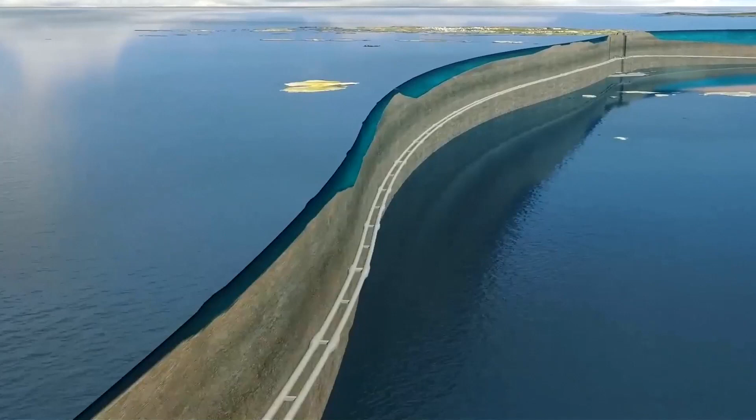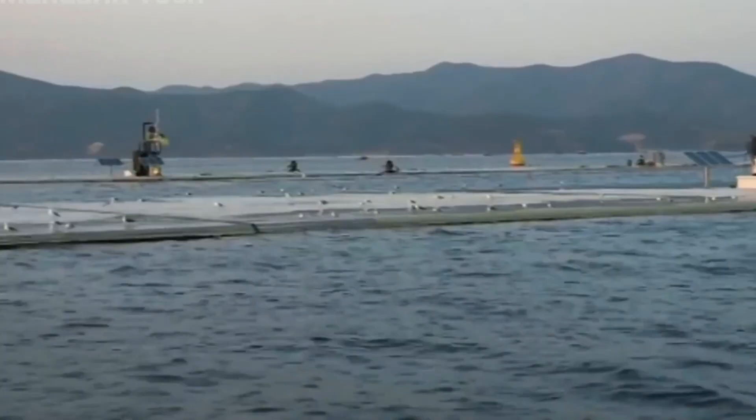It is a world of crushing pressure and absolute darkness, yet through it runs a ribbon of light and steel. Here, millions of tons of seawater hang suspended just meters above, held back by a seamless fusion of concrete and engineering, assembled with a precision that borders on the microscopic.

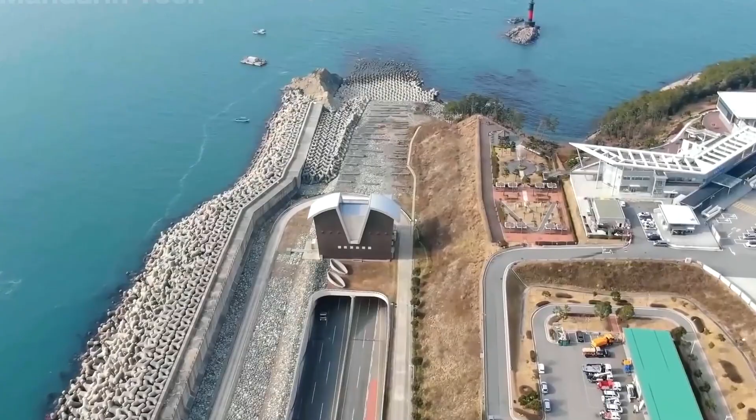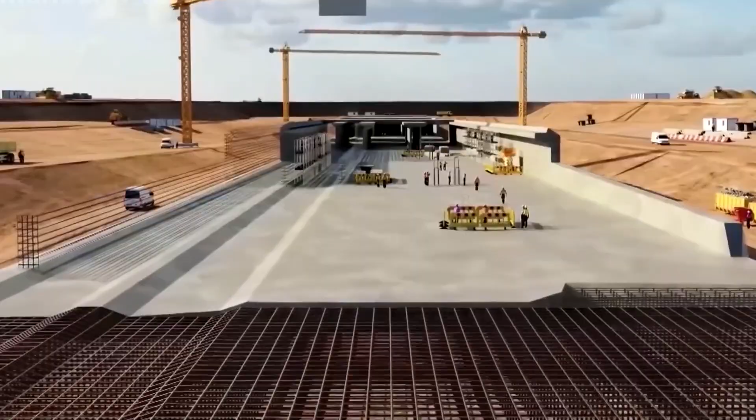This journey, seemingly torn from the pages of science fiction, is a testament to modern ingenuity. It is the reality of the underwater tunnel, a true triumph of human ambition. The question, however, is how such colossal structures are even possible.

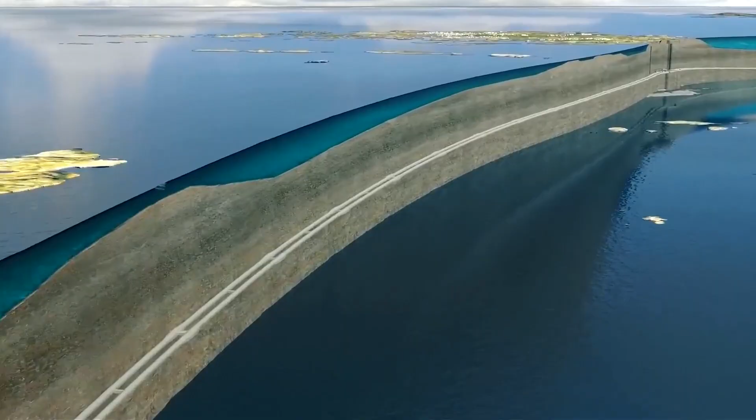How can we build in the face of immense water pressure, contend with shifting, unstable sediments, and operate in an environment utterly cut off from the world above? The answers lie deep beneath the waves, where humanity has learned to turn the impossible into breathtaking reality.

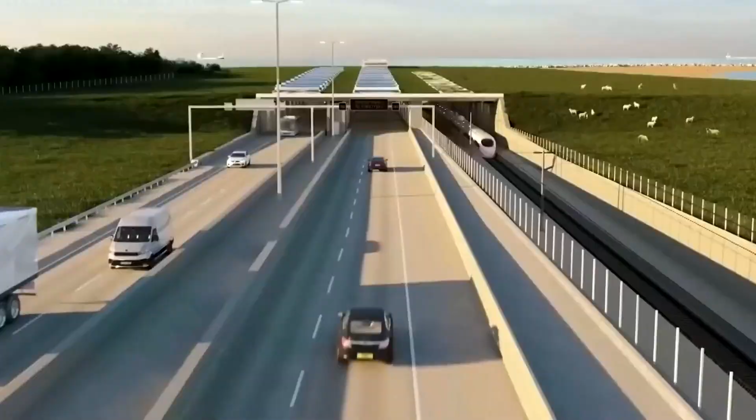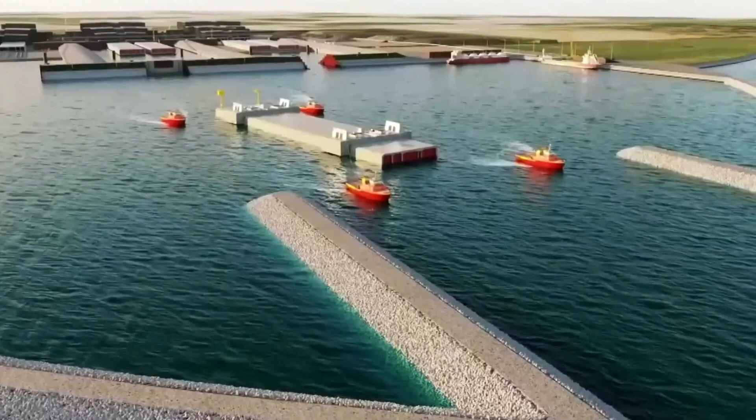Beneath the crushing weight of the ocean, a new world of connection is forged. These monumental passages are more than just engineering marvels. They are the lifelines reshaping global infrastructure and expanding the reach of human connection.

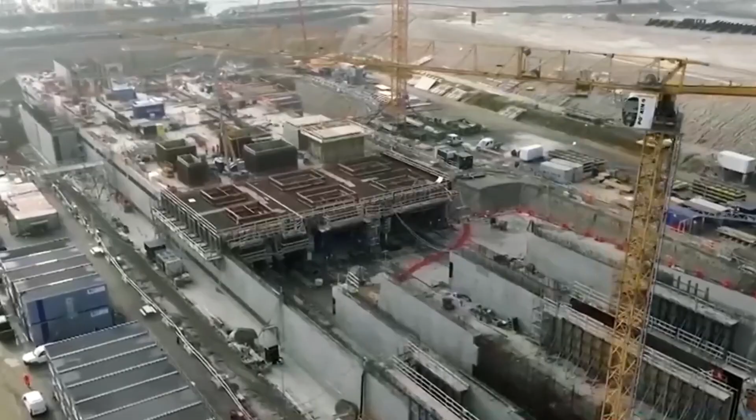Stretching beneath vast oceans, mighty rivers, and deep bays, they unite lands once separated by water, igniting a quiet revolution in transportation and logistics. Journeys that once required ferries or towering bridges are now completed in mere minutes as travelers move seamlessly from one island to the next, or cross a wide bay deep below the surface.

But their impact extends far beyond convenience. These submerged corridors sustain the global flow of goods and people, ensuring commerce moves swiftly, securely, and with remarkable efficiency. For many nations, particularly those with bustling port cities, these tunnels have become vital arteries of economic growth, unlocking new avenues for regional development and global trade.

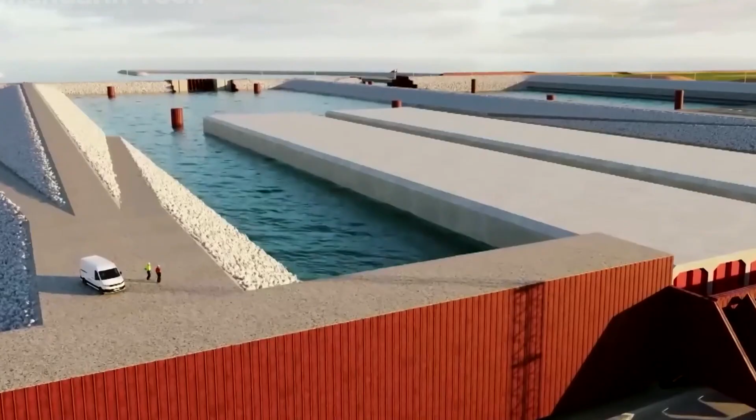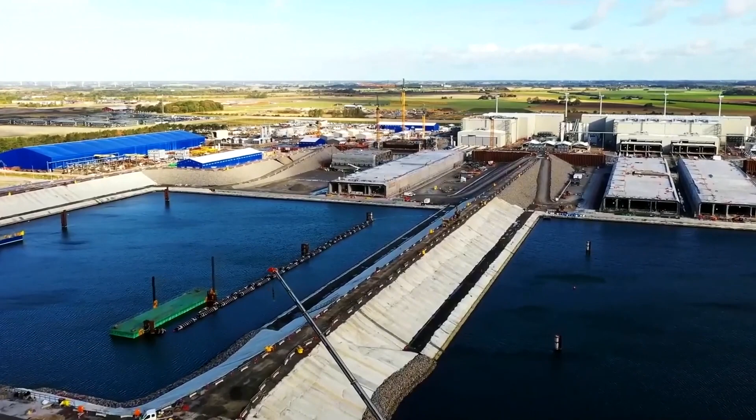The journey to create such a structure begins with exhaustive preparation and a demand for near-perfect precision. Every step is meticulously calculated to guarantee the project's safety and ultimate feasibility. The initial phase unfolds on the ocean floor with comprehensive seabed surveys.

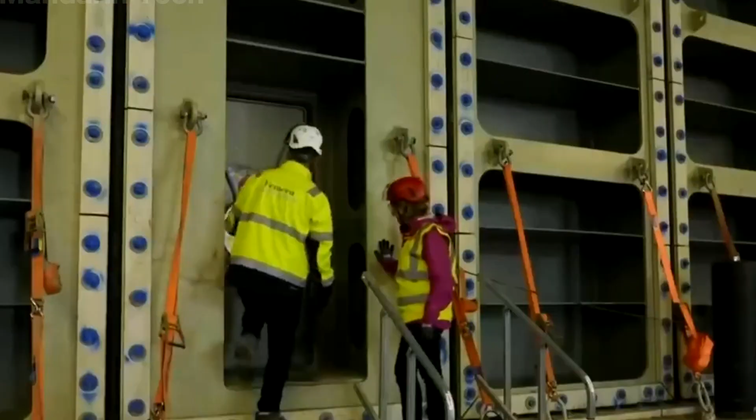Engineers meticulously map the subsea topography, gathering soil samples and analyzing rock strata to reveal the underlying geology. This deep analysis determines the stability of the seabed and uncovers any latent hazards that might compromise construction.

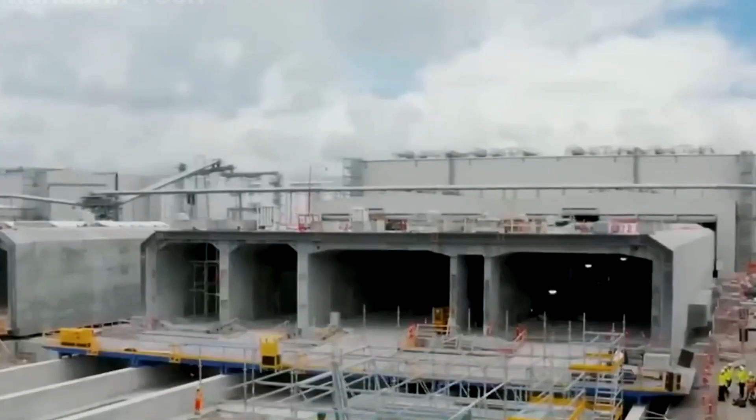Alongside the technical work, environmental stewardship remains a guiding principle. The project team must carefully assess the tunnel's potential effects on marine ecosystems, ensuring that native species are protected and their natural habitats remain as undisturbed as possible. To honor this commitment, noise mitigation measures are often employed during construction, and in some cases, artificial reef structures are installed to foster new habitats for marine life.

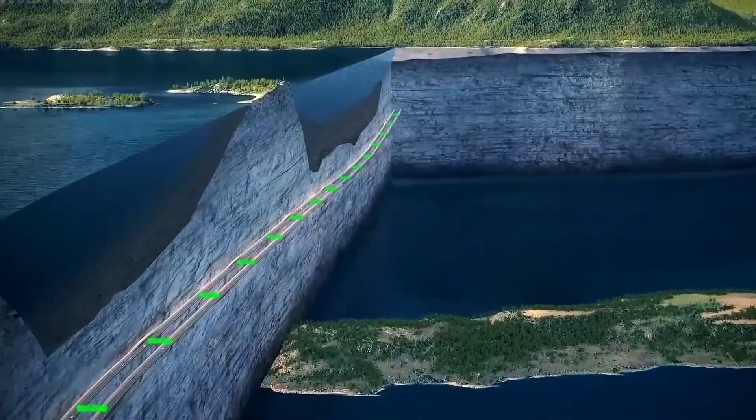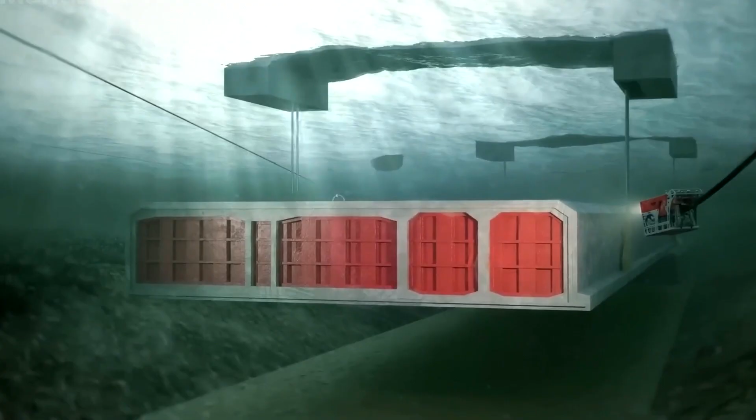On solid ground, a colossal structure takes shape, destined for a world without light or air. With the seabed now mapped, the true work of construction can begin, often relying on one of the most trusted techniques, the immersed tube method.

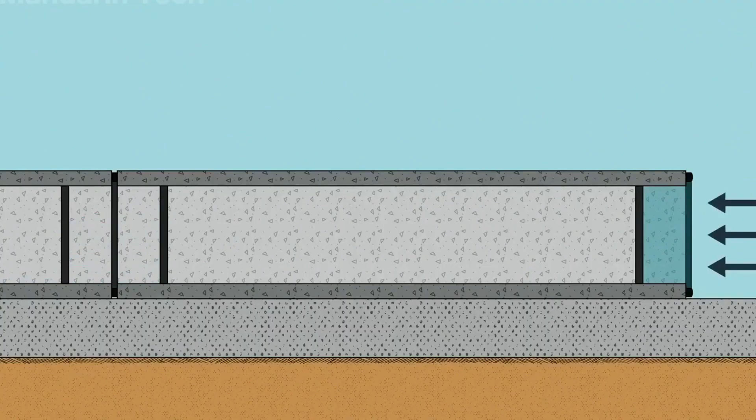The process unfolds not in the water, but on land, where enormous segments of reinforced concrete are prefabricated. Each standard element stretches an astonishing 200 meters and carries the weight of over 73,000 tons. These sections are crafted with meticulous precision, designed to align perfectly and form a watertight seal once submerged beneath the waves. Inside their hollow forms, dedicated compartments await their future purpose.

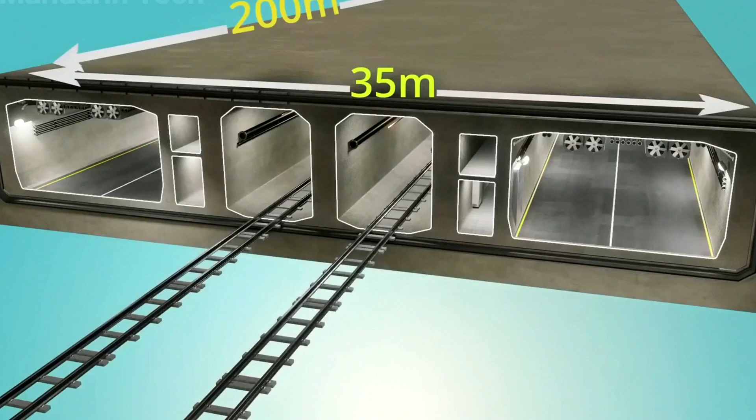Two vast chambers are reserved for highway traffic, another for a railway line, and a separate service corridor is carved out for future maintenance and inspection. When fabrication is complete, these behemoths are guided out to sea, where floating pontoons and specialized cranes begin the delicate task of lowering them into a pre-dredged trench on the ocean floor.

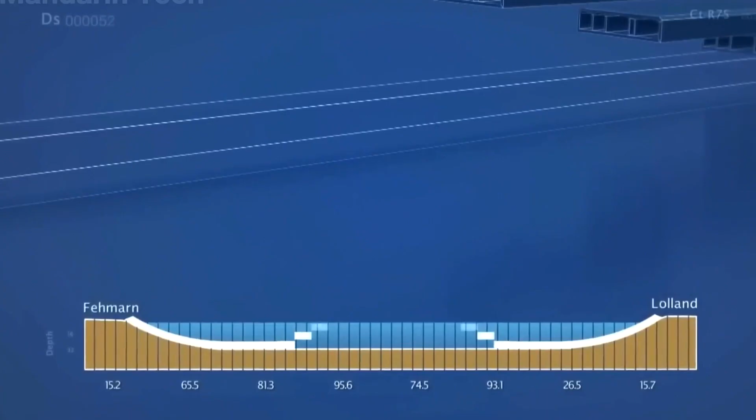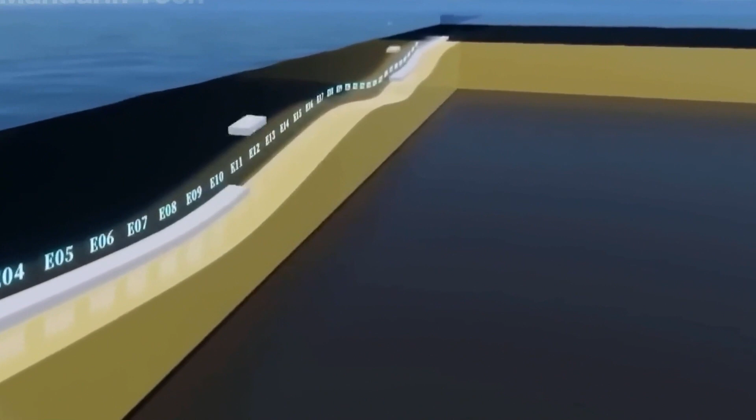One by one, each segment is carefully joined to the next, slowly forming a continuous passage of the required length. The most critical phase of this entire operation lies in these connections, where even the slightest imprecision could invite the crushing force of the sea.

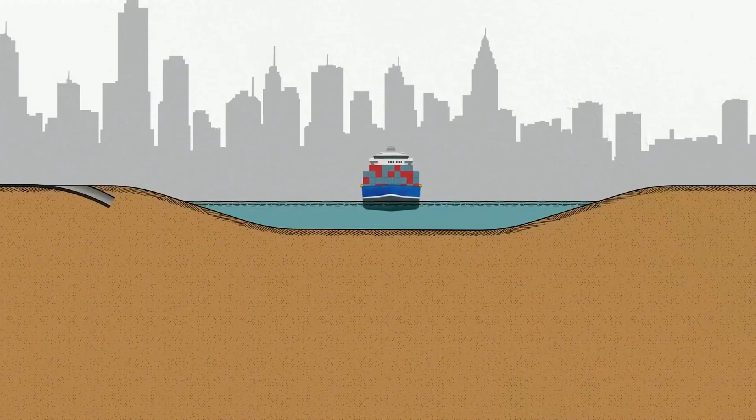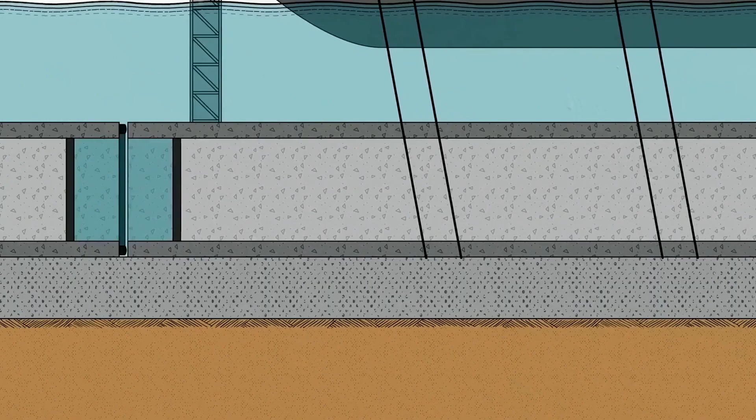To prevent seawater infiltration, heavy rubber gaskets are fitted between the segments, while layers of sand and gravel are carefully placed above and around the structure, anchoring it against the buoyant pressure of the water. Only when the connections are securely locked and stabilized are the temporary bulkheads at each end removed. This final step transforms the individual tubes into a single, seamless, and watertight tunnel.

Yet this remarkable technique is only viable where the seabed is stable and the currents are gentle.

In environments with strong turbulence or complex underwater terrain, the challenges of anchoring the segments and maintaining their integrity make the immersed tube method entirely impractical.

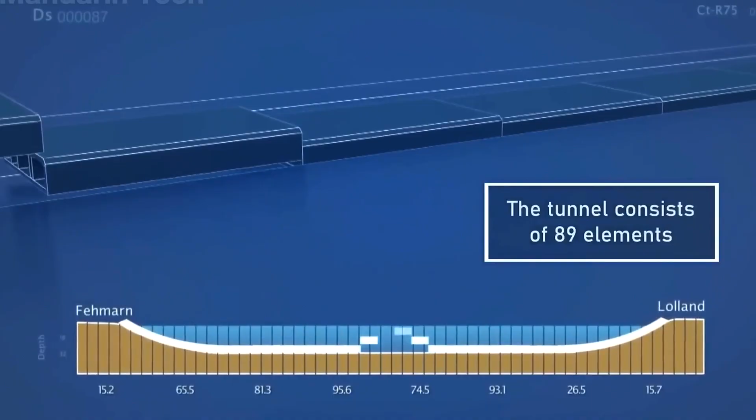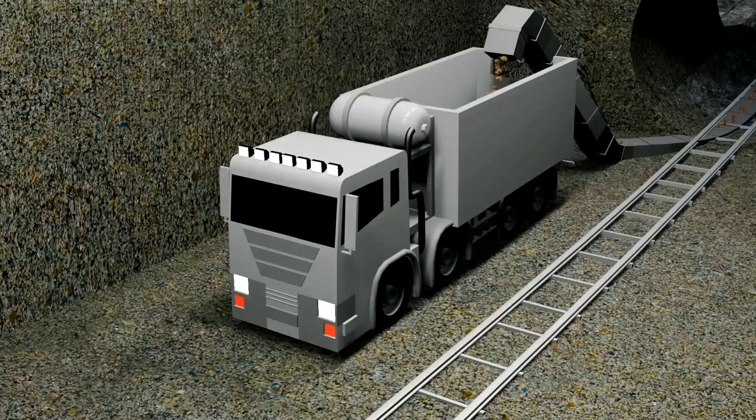It is a subterranean factory on the move, a city block of steel grinding its way through the dark. Where pipe lowering is not an option, engineers turn to the shield digging method, a technique embodied by the tunnel boring machine. This colossal system operates as a self-contained world, capable of excavating soil, removing debris, and installing reinforced concrete linings all in one continuous, closed-loop process.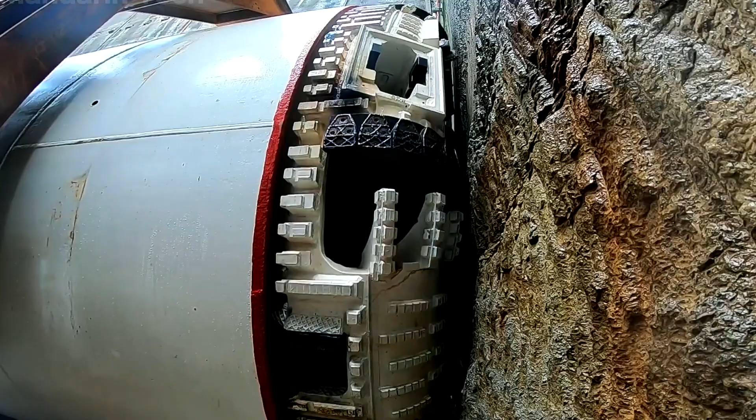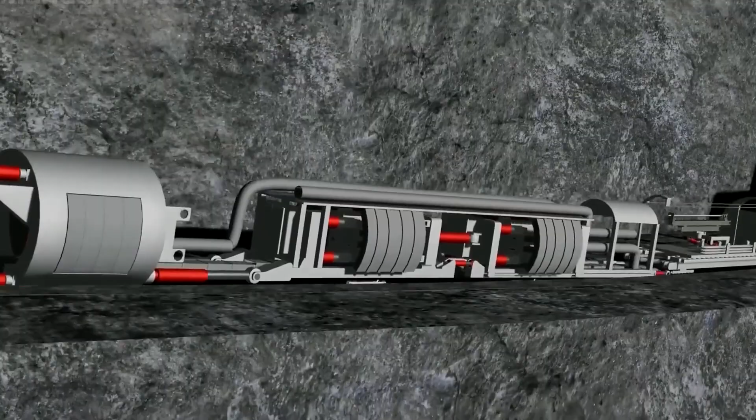This allows for uninterrupted construction deep beneath the earth or riverbeds, all while maintaining precision, safety, and minimal surface disruption. At the very front of this mechanical leviathan lies a massive cutter head, a spinning disc of steel nearly 12 meters in diameter and weighing over 200 tons.

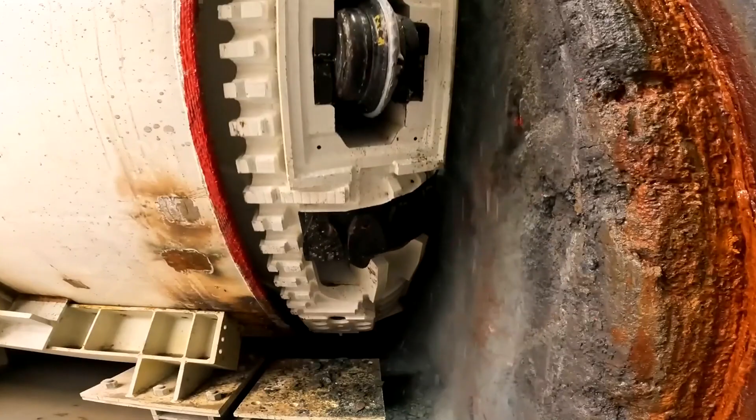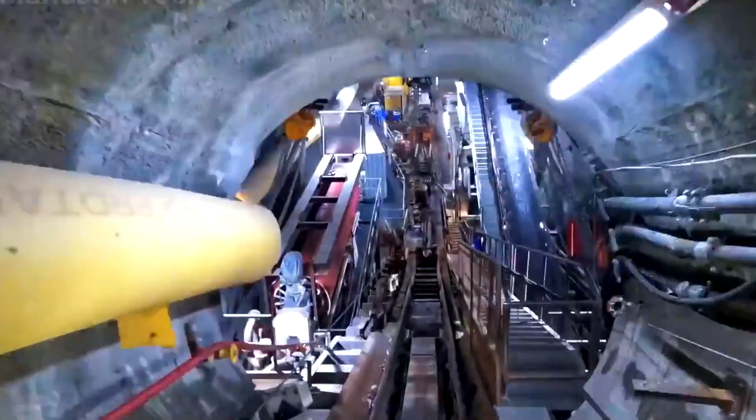It is armed with 140 high-strength cutting discs and blades, turning at a deliberate pace of approximately 2.7 revolutions per minute. As it rotates, the cutter head exerts a crushing force of up to 400 bar, enough to pulverize even compact rock and dense soil. The excavated material is immediately drawn into a chamber directly behind the spinning face.

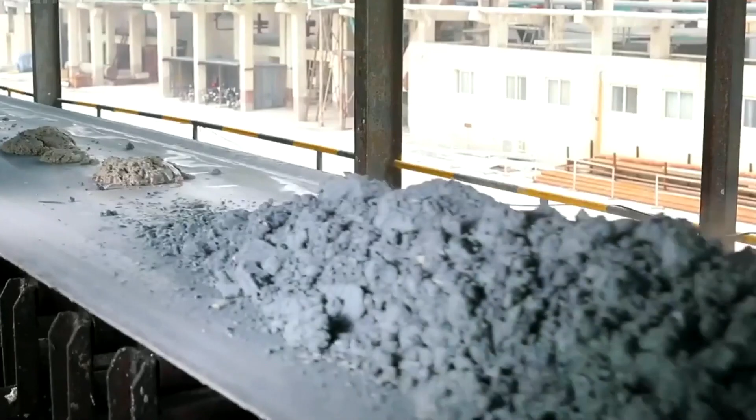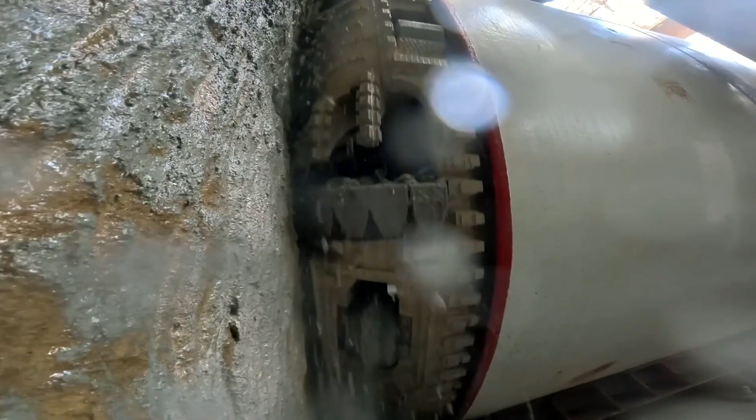Here, foam and water are injected to maintain a delicate earth pressure balance, a critical step that prevents collapse in soft or water-saturated ground. This slurry mixture is then carried away on a continuous conveyor belt, traveling all the way to the surface where it passes through a discharge tower. Lime is mixed in to reduce moisture before the processed earth is loaded onto trucks for disposal.

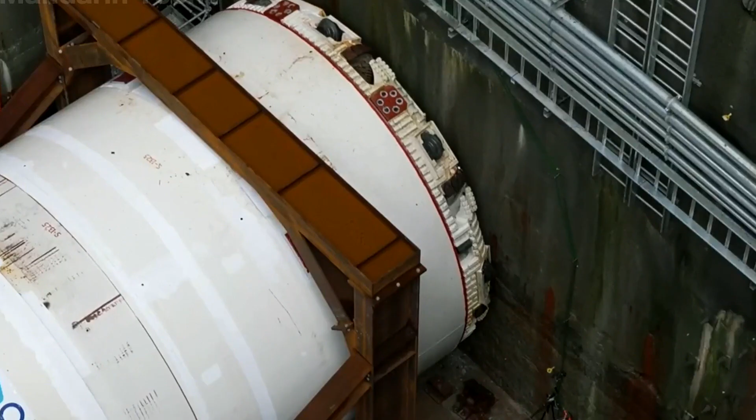Meanwhile, as the machine inches forward, its rear section automatically installs precast concrete segments, forming the permanent tunnel lining. Once a full ring is assembled, a specialized grout injection system fills the void between the new lining and the surrounding soil, securing the structure and ensuring it remains completely watertight. Hydraulic cylinders then push the entire machine forward, beginning the next cycle of excavation and installation.

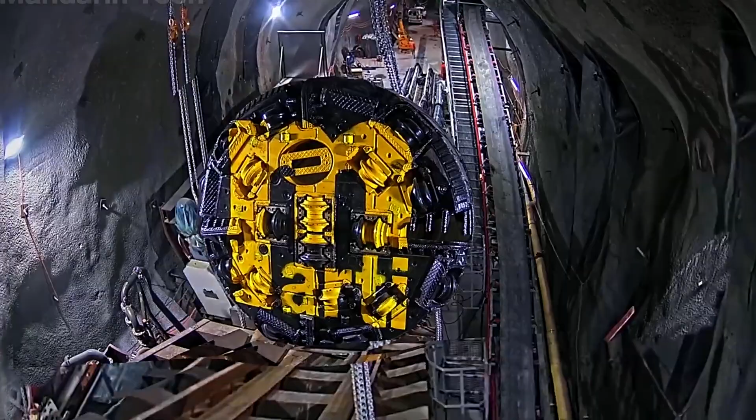Each cycle takes roughly 90 minutes, allowing the team to complete 8 to 10 lining rings per day, which translates to about 20 meters of finished tunnel. Operating around the clock, hundreds of engineers meticulously monitor pressure, temperature, power systems, and real-time camera feeds to maintain perfect stability. Thanks to its sealed and automated design, the TBM can operate for months without interruption, a true symbol of modern engineering. Its only significant limitation is speed.

When it encounters extremely hard rock or unpredictable pressure zones, engineers must halt the process, extract the machine, and switch to alternative methods to safely continue their work. When faced with geology that can shatter steel, engineers turn to a more primal force.

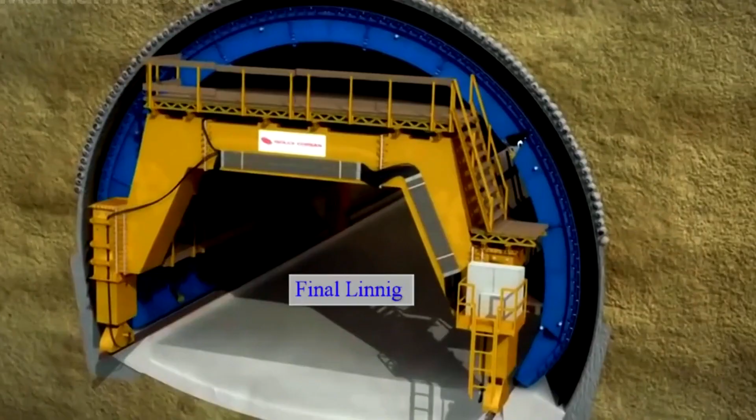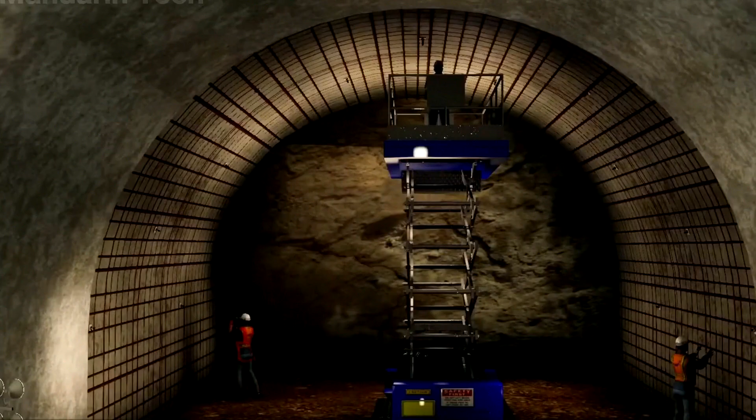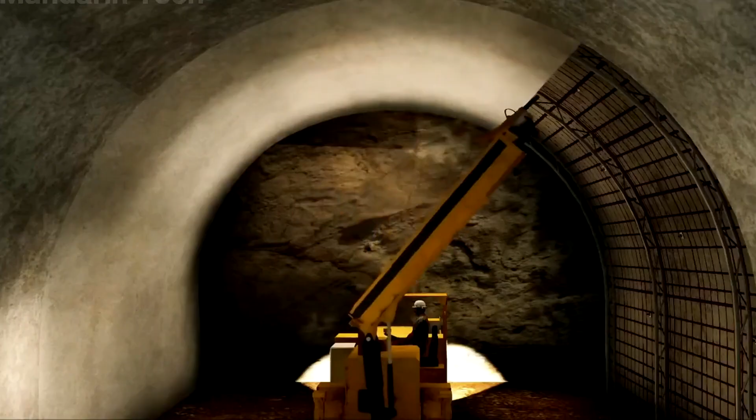This is the drill and blast method, a raw yet precise technique reserved for the planet's hardest rock, where modern machines simply cannot advance. The work unfolds not in a continuous grind, but in a meticulously choreographed cycle. It is a sequence of drilling, blasting, clearing debris, and then reinforcing the newly exposed earth, demanding unwavering precision and a strict adherence to safety.

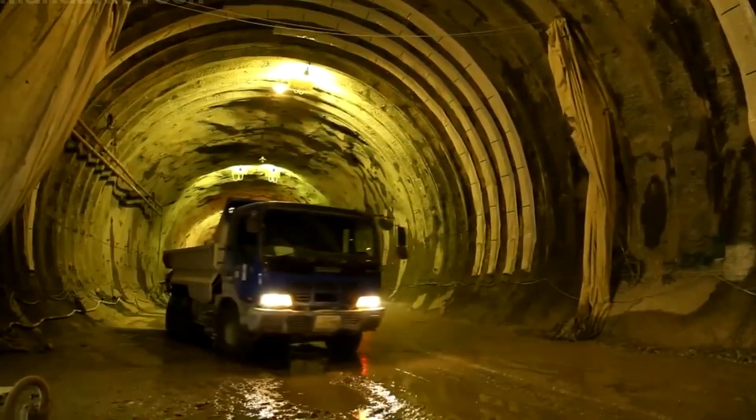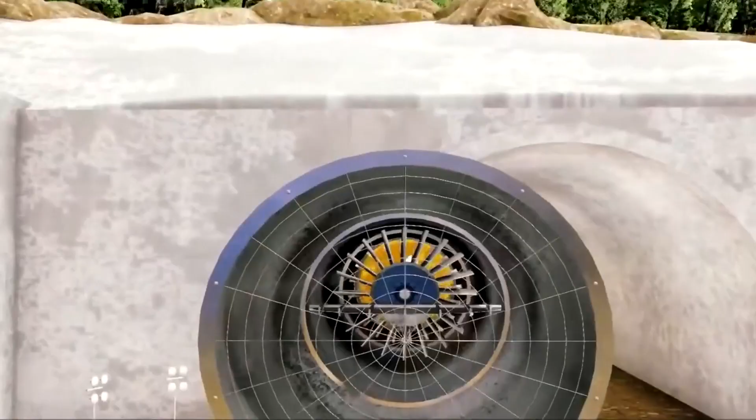The process begins as dozens of blast holes are bored into the tunnel face, following a pattern laid out in technical blueprints. Into each borehole, cartridges of explosives are carefully inserted, each one fitted with an electric detonator. These are all linked by detonating cords, arranged in specific groups to govern the exact sequence of the explosion. Every detonator is timed with immense care, designed to optimize rock fragmentation while minimizing the resulting vibrations and their impact on the surface far above.

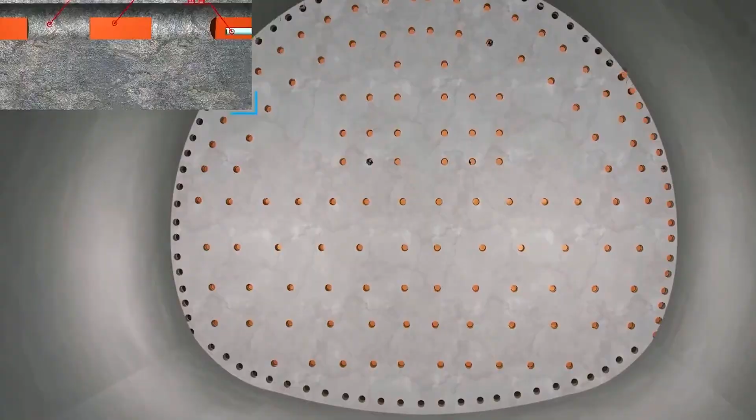Before any material is brought underground, it is scanned, tested, and certified as safe. As preparations intensify, massive ventilation fans and air ducts are disconnected and depressurized, a crucial step to prevent the shock wave from ripping the ventilation system apart. Just before the blast, crews measure the circuit's resistance and perform a final, thorough inspection of every connection. Only when every single safety condition is verified can the command be given.

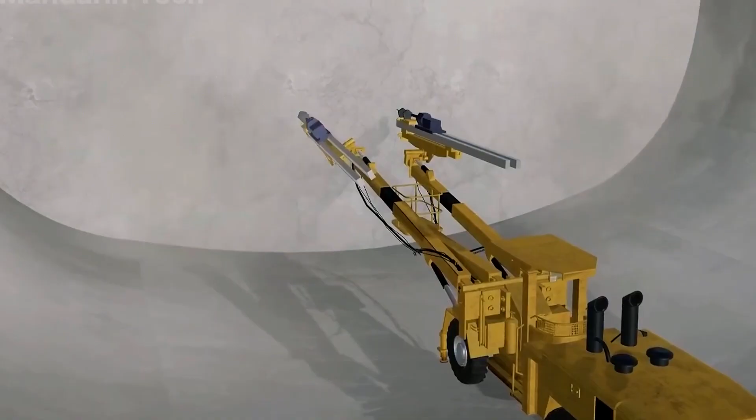Electrical signals race through the network, triggering the detonators and shattering approximately 1.5 meters of solid rock from the tunnel face. Following each blast, all work ceases for at least 20 minutes, allowing for crucial inspections and for the air to be cleared. On an average day, each blast consumes between 80 and 100 kilograms of explosives, with 9 to 18 such detonations occurring daily, the frequency dictated by the geology and the project's scale.

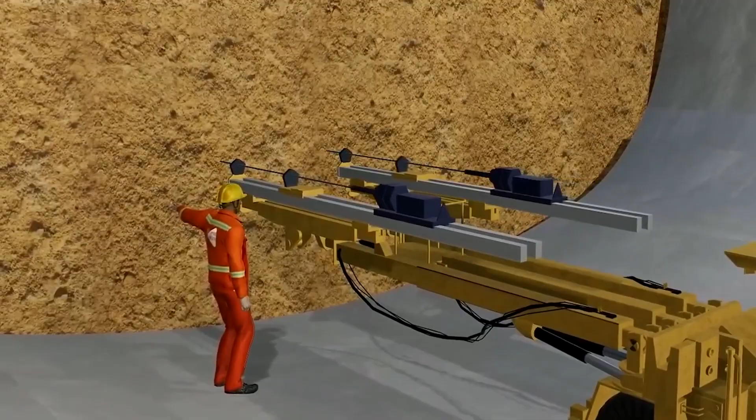While this method can offer faster progress at a lower cost, its intense vibrations can crack nearby structures and cause water leakage, making it entirely unsuitable for underwater tunnels where shock waves would also devastate marine life. For these reasons, the drill and blast technique is reserved almost exclusively for mountain tunnels and dry ground excavation, in places where other methods are simply not an option.

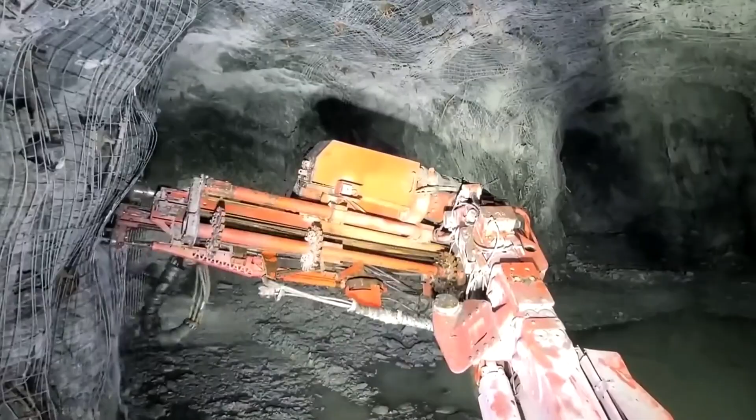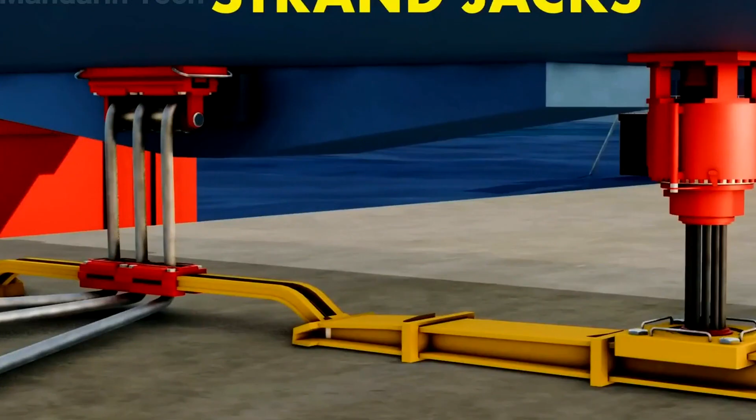When the Earth itself refuses to yield and the sea presses in from all sides, engineers must turn to the oldest methods of all. In geological conditions too treacherous for massive boring machines, or where immense water pressure makes other techniques impractical, traditional excavation becomes the final, formidable option.

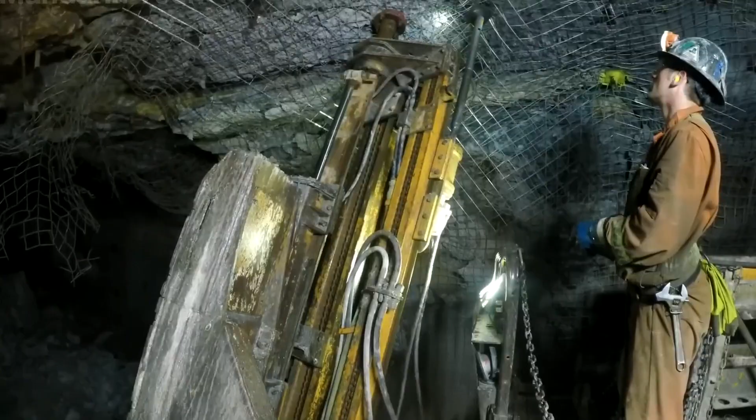The process begins with the construction of a main vertical shaft, plunging from the surface deep down to the tunnel level. This shaft becomes the artery for the entire project, a conduit for workers, machinery, and materials moving in, and for excavated debris moving out.

Crews drill into soil and rock, loading the spoils into sealed containers that are hoisted to the surface by crane for processing. In zones where blasting is forbidden or the ground is too fragile, they shift to hydraulic cutting tools, meticulously slicing through the sediment layers. Though a slower technique, it critically reduces the risk of ground settlement and preserves the tunnel's integrity.

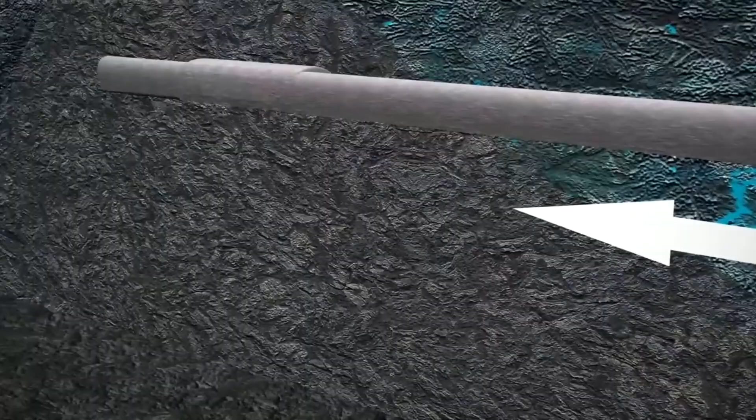After each phase of digging, the newly exposed earth is immediately sealed with a layer of shotcrete. This is followed by the installation of heavy steel arches, mesh reinforcements, rock bolts, and anchors, a layered defense against the immense pressure waiting to reclaim the space.

Around the clock, mechanical and maintenance teams monitor air pressure, equipment integrity, and the vital dewatering systems. The most critical factor is maintaining a perfect equilibrium between the tunnel's interior and the surrounding environment. Any imbalance could invite the sea to infiltrate, flooding entire sections in an instant.

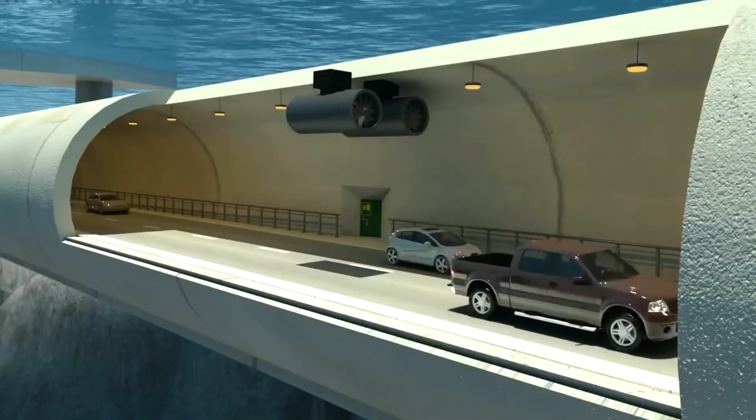By merging classical engineering principles with modern monitoring, this method remains a trusted solution for the most complex underwater projects. It is here, beneath the ocean, that only persistence, precision, and a deep understanding of marine pressure can guarantee a structure's survival. The final section is lowered, the water stills, but the true test of endurance has only just begun.

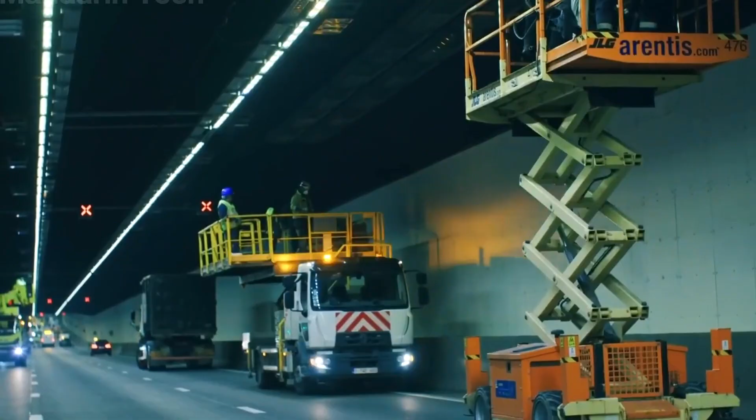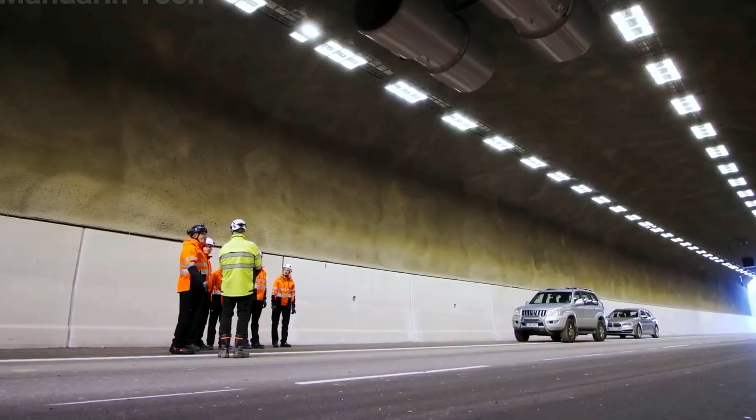Before a single vehicle can pass through, the structure must prove its safety in a rigorous operational assessment. Many of these modern marvels are designed with two distinct levels: a clever solution that doubles traffic capacity without widening the tunnel's footprint in the delicate seabed. Inside, vehicles will move at a steady 60 kilometers per hour, with emergency exits placed every 200 meters for immediate access. Once construction is complete, engineers subject the tunnel to a gauntlet of trials.

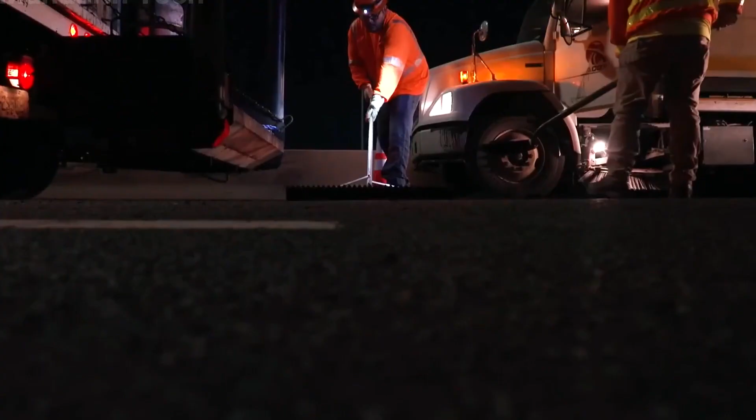They test its waterproofing against immense pressure, its resistance to fire, and the performance of its complex heating and ventilation systems. The overall stability of the entire structure is scrutinized through a relentless series of evaluations, ensuring every component can withstand the forces of the deep.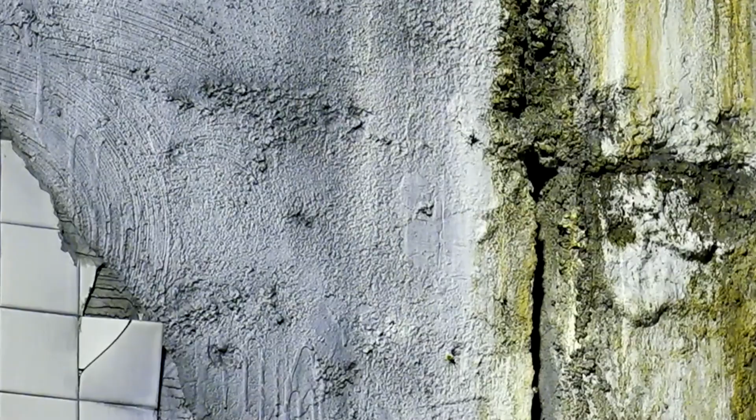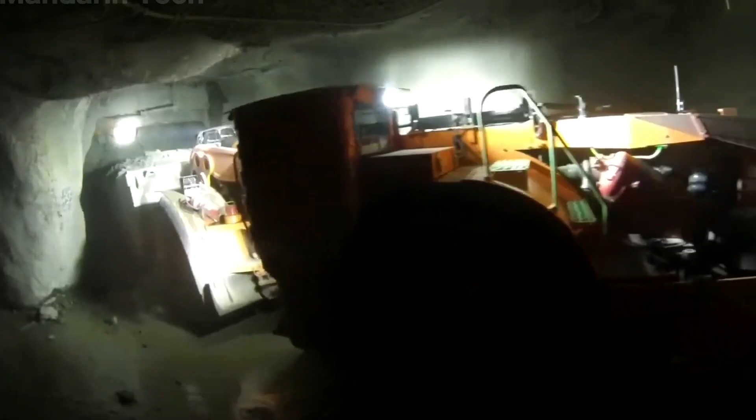The journey of an underwater tunnel, however, doesn't end when it opens to the public. Its true lifespan is measured not in concrete and steel, but in constant vigilance. Dedicated technical teams conduct methodical inspections, examining the concrete lining, waterproof membranes, support frames, and drainage systems for the slightest sign of deformation or cracking over time.

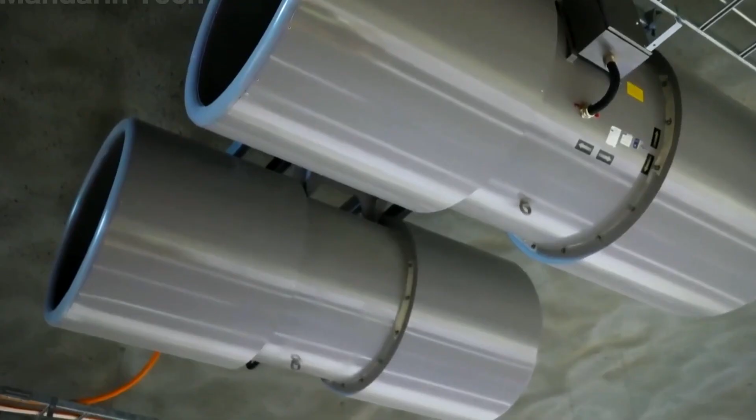An invisible network of guardians stands watch. Hundreds of sensors embedded along the tunnel act as a nervous system, continuously monitoring pressure, temperature, humidity, and vibration. This stream of real-time data flows to a central control room, allowing engineers to detect the earliest whispers of structural fatigue.

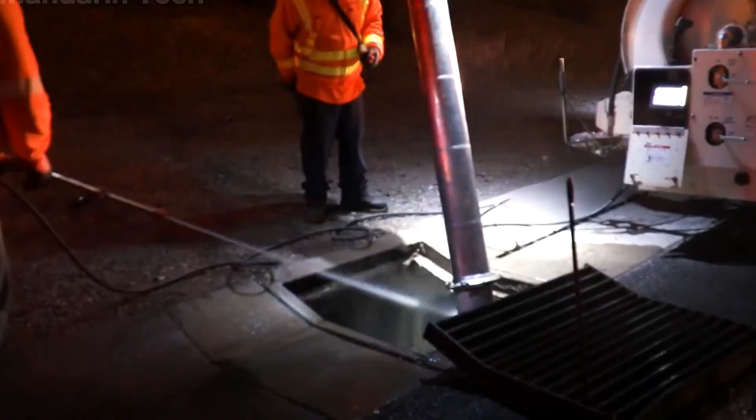Meanwhile, specialized vehicles equipped with high-pressure water jets and powerful suction systems periodically cleanse the tunnel, removing sediment to keep the artery clear and prevent blockages. Through this fusion of advanced technology and meticulous human care, these passages can operate safely for decades, a lasting testament to engineering resilience in the harsh, unforgiving depths of the ocean.

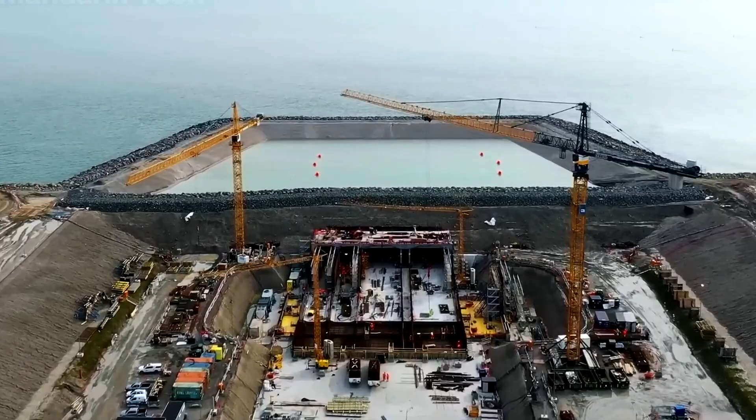In the crushing dark, where light itself surrenders, humanity has carved its own horizons. Beneath the immense weight of the ocean, arteries of steel and concrete now pulse with human ingenuity. Each segment laid in this unforgiving world is far more than a triumph of engineering. It stands as a profound symbol of our courage and the relentless drive to push beyond every known boundary.